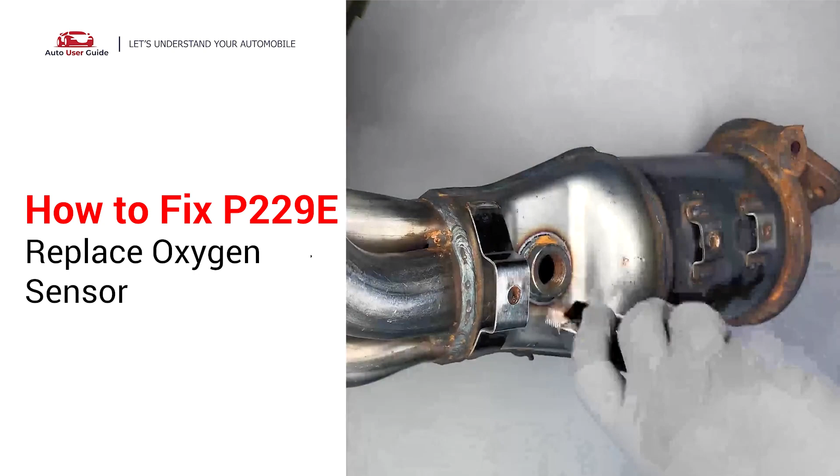By replacing the damaged oxygen sensor, you can easily fix the P229E error code by yourself.

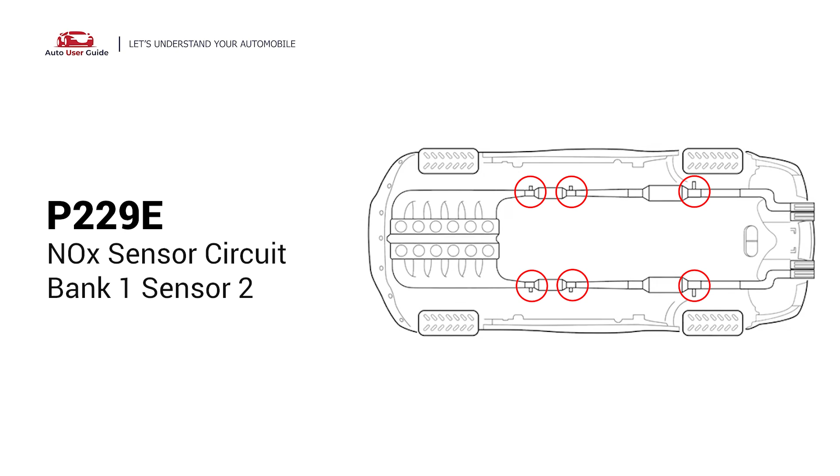It indicates a fault in the NOx sensor circuit for Bank 1 Sensor 2, which monitors exhaust emissions. Under this circumstance, short-distance driving is permitted, but your vehicle should be repaired as soon as possible.

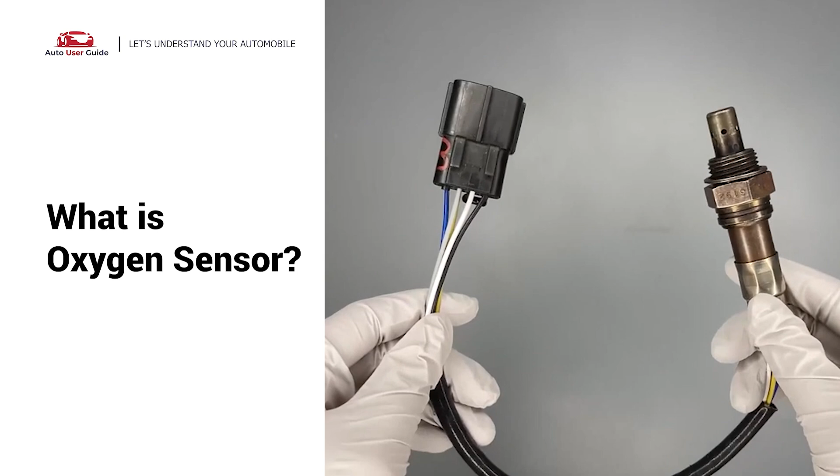Oxygen sensors, also known as O2 sensors, help determine whether the air-fuel ratio of combustion engines is rich or lean in real time.

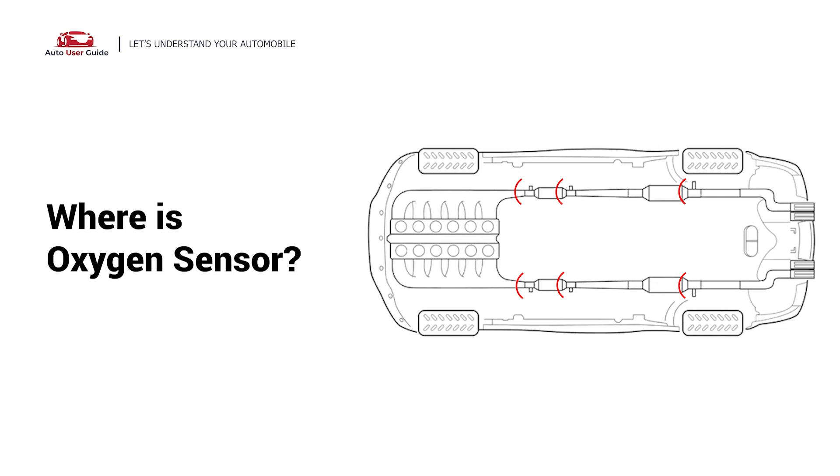Oxygen sensors are located before and after the catalytic converter, and here are the sensor's locations.

A faulty oxygen sensor may cause black smoke to come out from the exhaust. You can notice fuel efficiency loss and a sulfur-like or rotten egg smell.

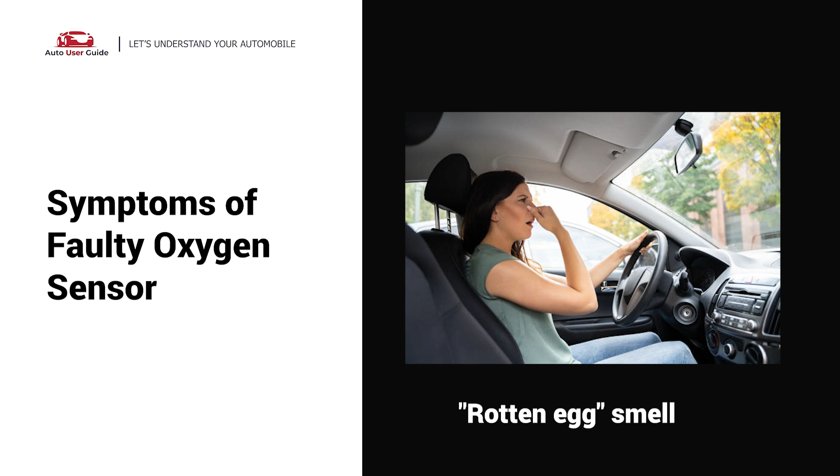Here are two methods to fix the oxygen sensor. First, modify the oxygen sensor.

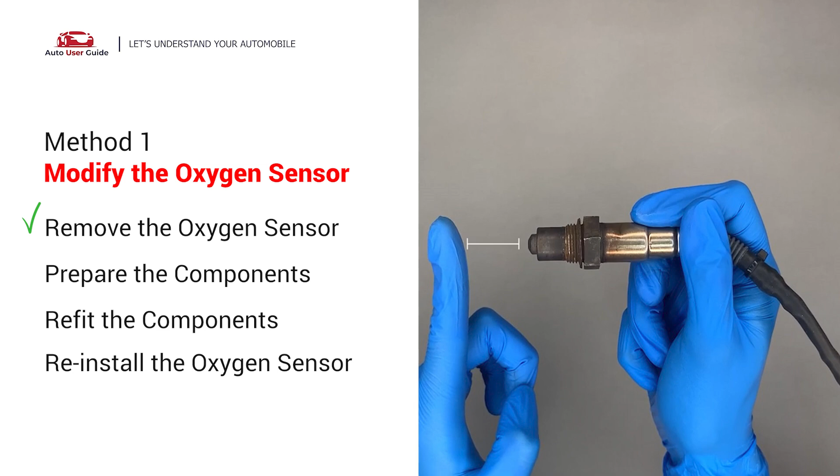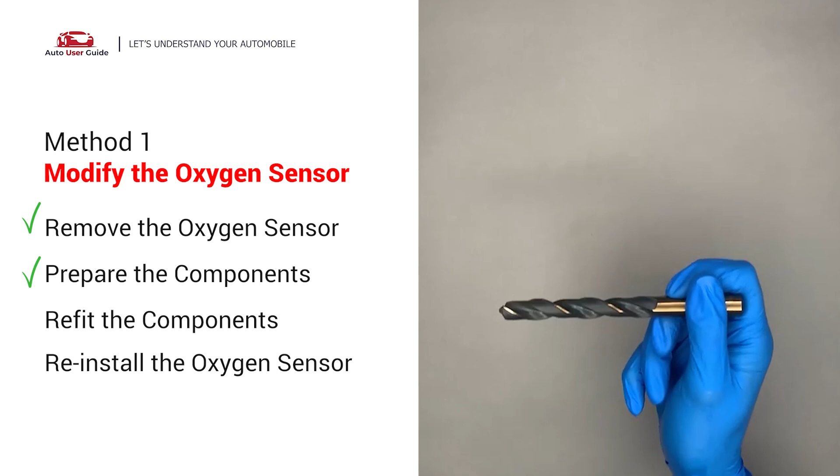You can remove the oxygen sensor from the converter by putting extra space between the sensor and the converter. Now getting the spark plug non-fouler, which now has enough space to fit into the oxygen sensor, use a 1/2-inch drill to refit it. By doing this, put them together and put back on the catalytic converter.

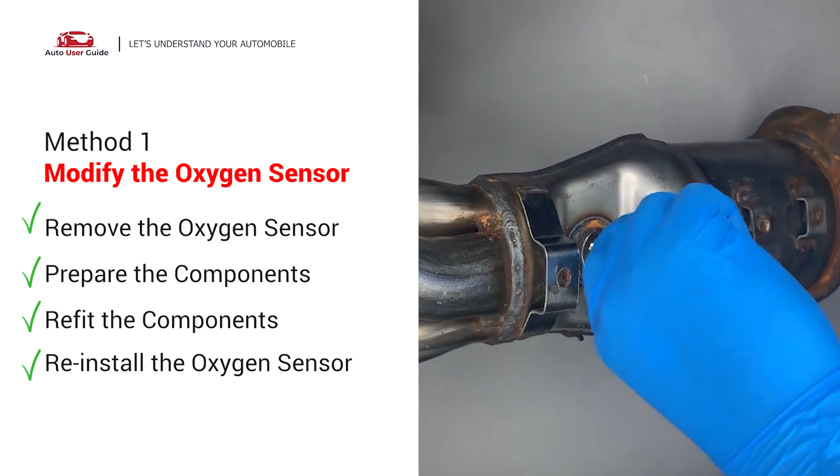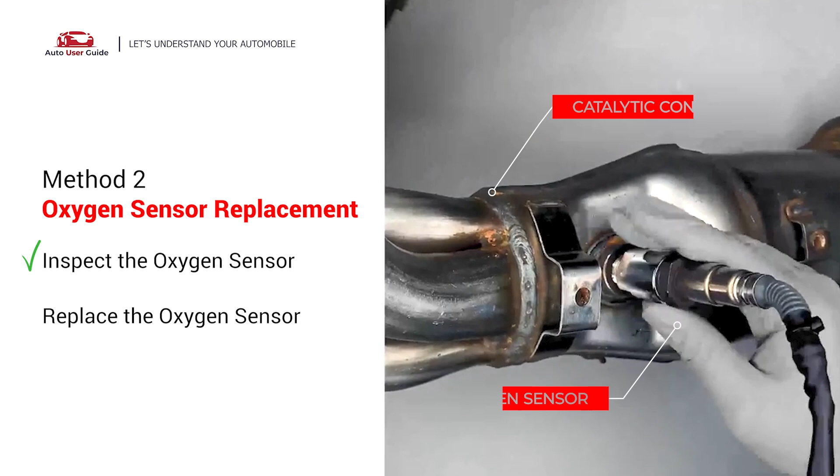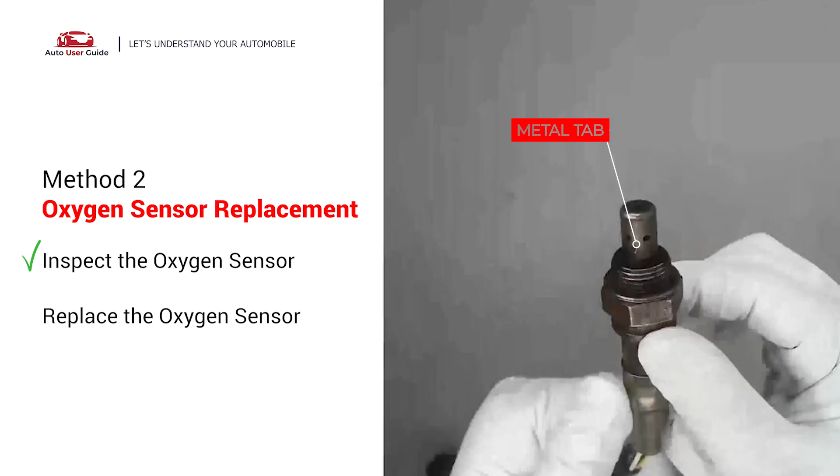Oxygen sensor replacement. Carefully remove the oxygen sensor from the catalytic converter and visually check the oxygen sensor electrical connections, wire harness, and metal tabs for any damages. If damages are found, then replace the oxygen sensor.